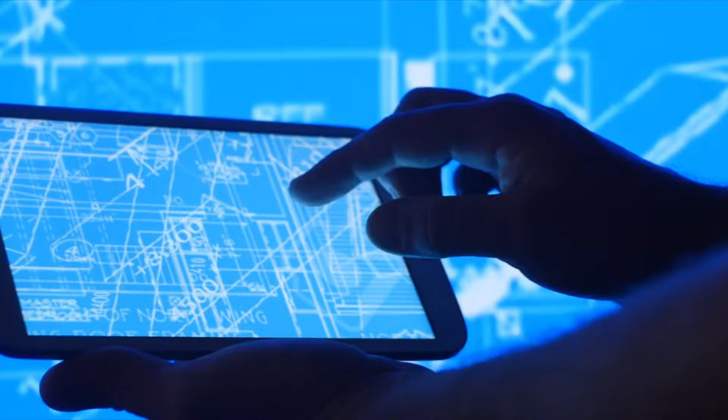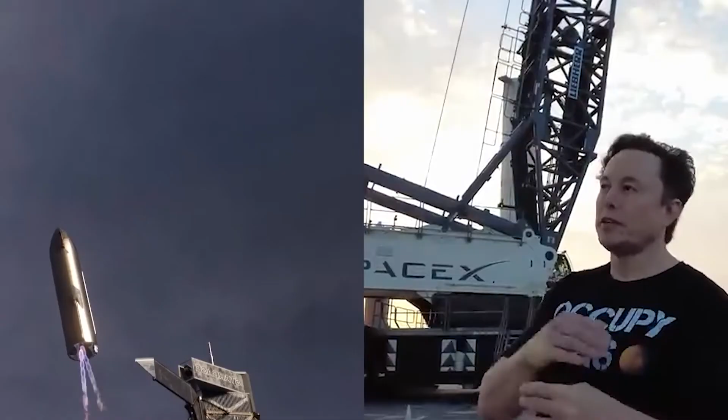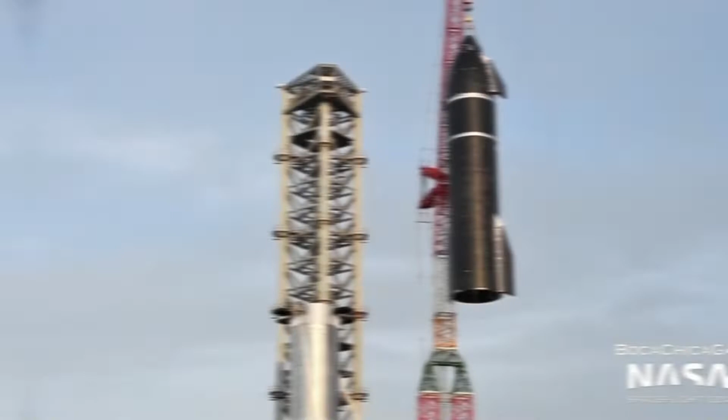The first manufactured prototype in engineering is always sloppy, but not in this case. You'll see how SpaceX engineers transformed a spacecraft that appears terribly crude into a much more complex model with smoother metal walls and less obvious welds over time. Compared to the previously produced rough, unsightly surface finishing, the welded connections appear brighter and smoother. So how did the spacecraft go from being a hideous masquerade to having a smooth, well-detailed surface?

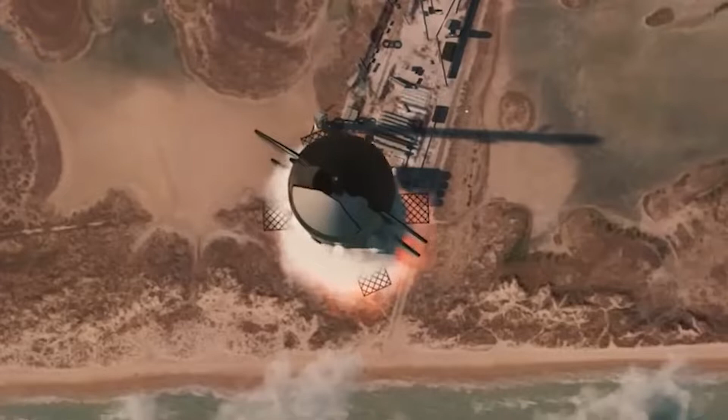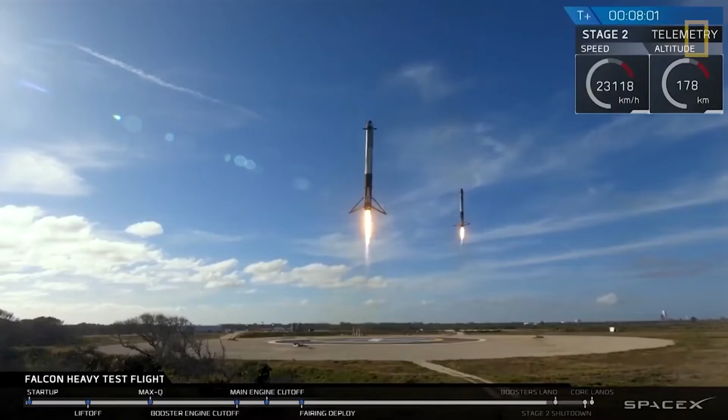You'll probably agree that the spacecraft, which stands 390 feet tall with its nose cone pointed upward, is the first structure that appears to be this tall and cylindrical. Did you know welders who worked as reservoir welders in oil corporations and water tanks were the first ones to construct the rough-looking prototypes of starships? These individuals had to be quickly hired by SpaceX to work on the spacecraft. So when it comes to cylindrical skyscraper-like buildings, inexperienced welders created the first Starship prototype. Therefore, they might not have acquired the first-hand experience necessary to operate on such tall, hollow, and wide constructions.

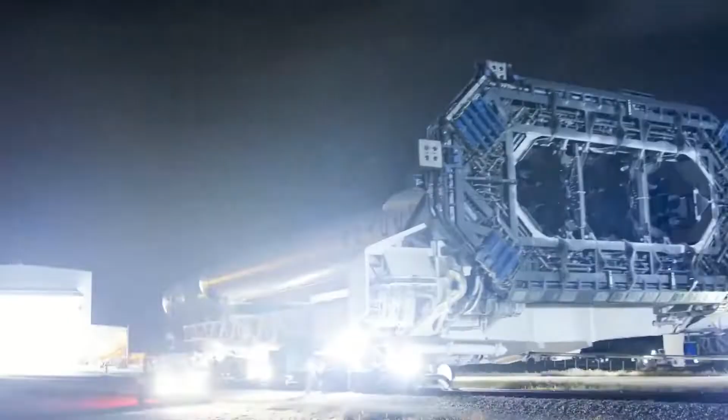But before we go into those details, let's take a look at what welding is and why it is so challenging to do correctly. Webster's Dictionary describes welding as the use of a hot torch to join two metals together.

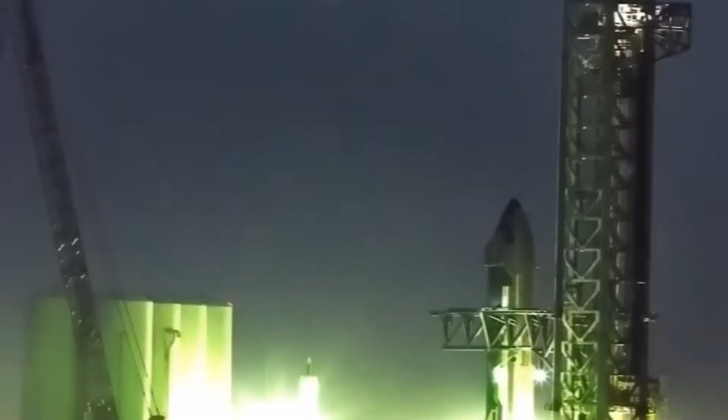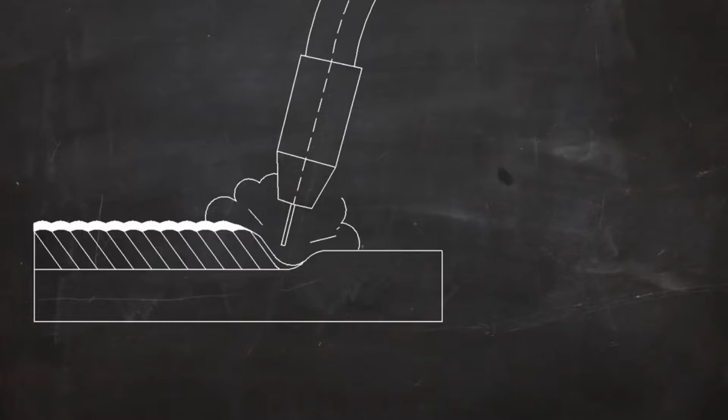How did SpaceX accomplish transforming the practice of rough surface welding into something smooth? To understand this, let's go back in time. The early Starship prototypes were built using a welding method called flux core. In this method, a metal wire is subjected to a voltage that causes an arc to form between the wire and the metal, causing the metal to melt. The metallic wire's tip melts as well, falling into the melted stainless steel to fill up any gaps and cracks that might have been there.

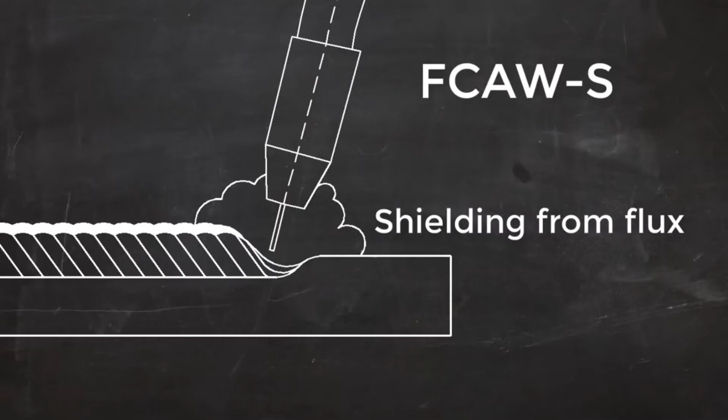Flux core welding involves wrapping the metal wire in a solid substance that, when burned, creates a shielding gas around the weld junction. This protects the weld and keeps it from interacting with nearby oxygen, which might potentially lead to failure. Each ring is made of a single, significantly thinner sheet of stainless steel.

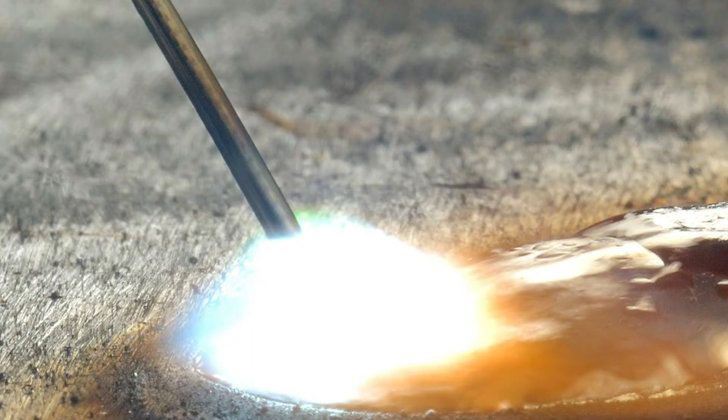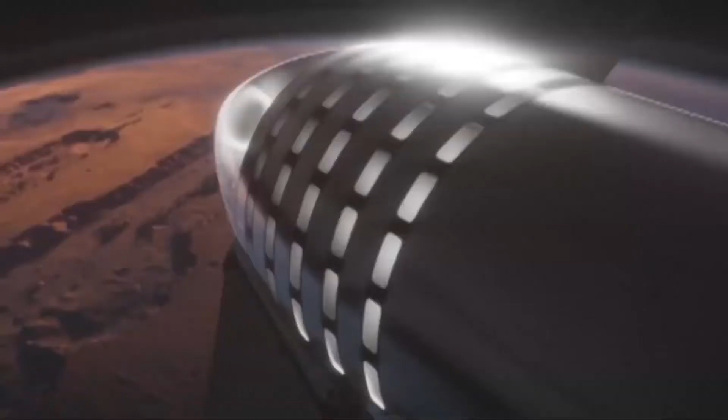This kind of thin sheeting will lower the steel's high melting temperature during the welding process. In order to avoid abrupt brittleness during welding, the engineers moved from stainless steel type 301 to stainless steel type 304L. The welders at SpaceX also upgraded to tip-TIG welding, which gives them more control over the welding arc. Compared to when prior welding techniques were utilized, this allowed the welder to tighten the arc and weld significantly deeper into the metal.

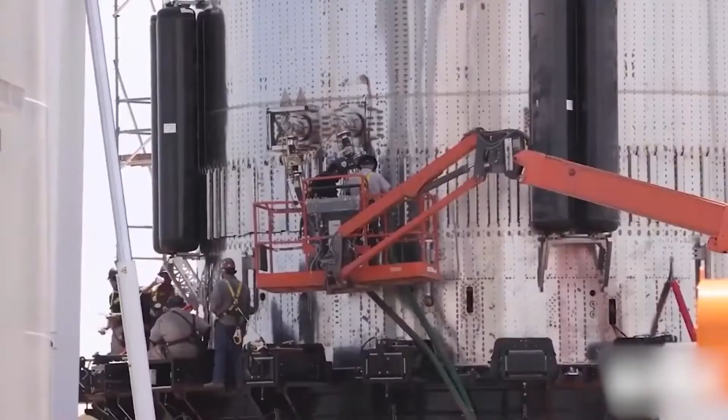SpaceX learned the value of purchasing robotic welding equipment from businesses like Liberty and KUKA. Robotic welding would allow SpaceX to automate the difficult welding process and start making welds that are cleaner and more accurate. For many of the Starship sections, SpaceX has probably turned to laser welding. It is possible to weld the ring segments in a single pass because the heat produced by laser welding is more focused and penetrates the metal to a deeper depth.

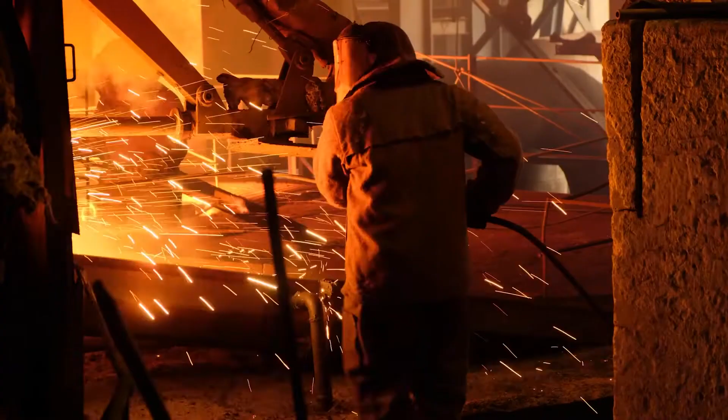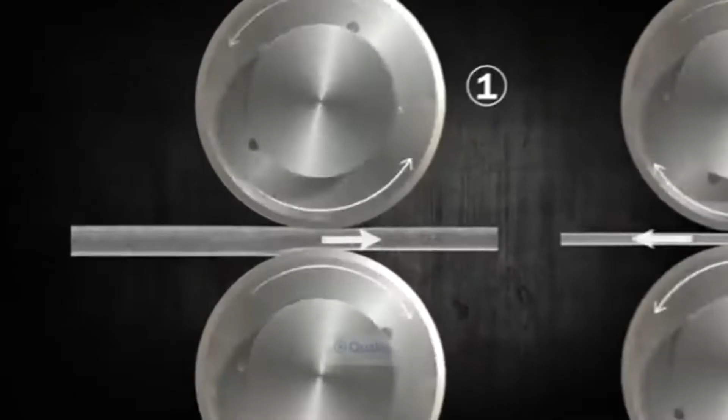To increase the strength of each weld, however, a different procedure must be carried out. Once more, before being welded into rings, the stainless steel that Starship uses in its construction goes through a procedure known as cold rolling after being cut. So what is cold rolling? Cold rolling is the process of compressing and spreading the metal's grain structure by passing the metal through a set of rollers. This process increases the metal's robustness and durability.

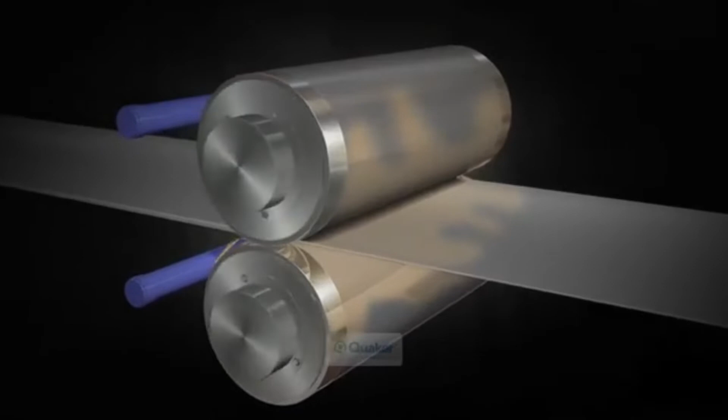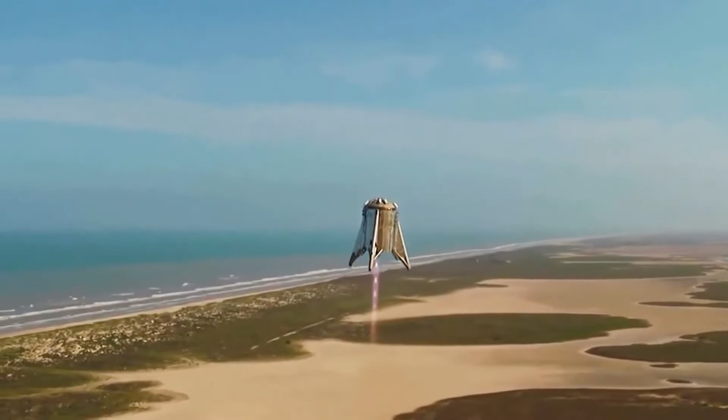Additionally, the heat from the welding process makes the welded section flexible. Therefore, a planishing machine will be put to use, enhancing the strength of all welded seams. The welds are squeezed during the planishing process with a hammer until they have the same hardness as the surrounding metal. Following that, the welds will seem better and the welded seams will have a much smoother appearance.

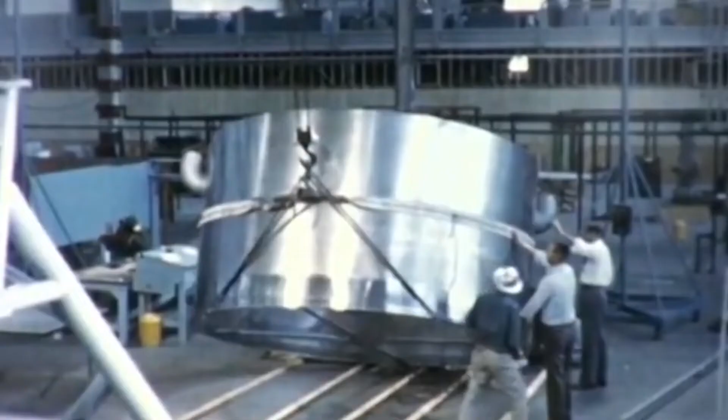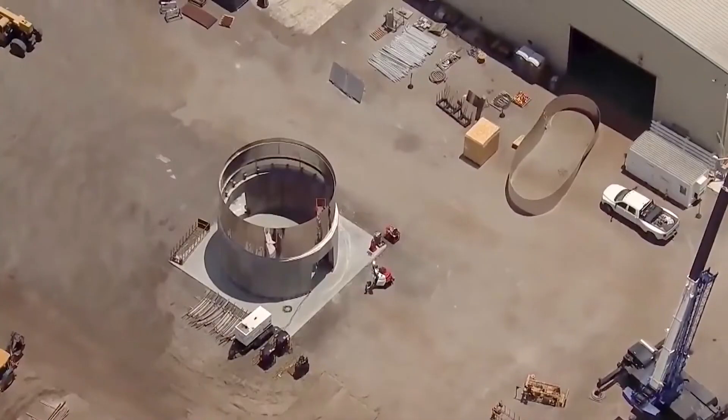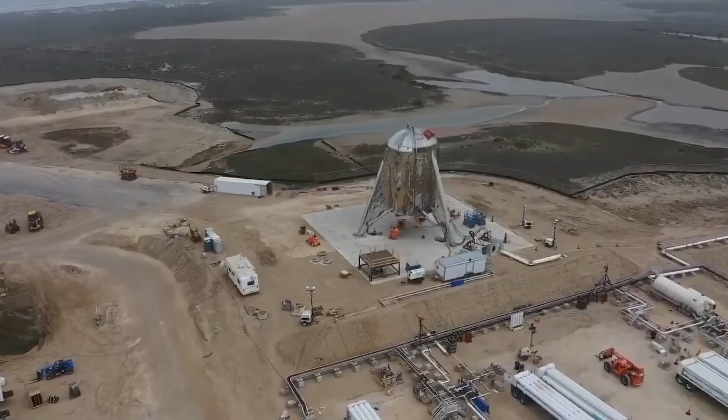To be clear, the work of SpaceX welders consists of more than simply applying welds. Although this may not always be the case, for Starship, a good quality for surface finishing is always maintained. This equipment is used to weld, cut, trim, fit, and construct metal components to the prescribed dimensions in order to build and assemble. Engineering drawings and specifications must be analyzed when planning welding operations in a location without procedural knowledge. And to do this, you cannot rely on unskilled laborers who are unable to construct anything out of metal sheets.

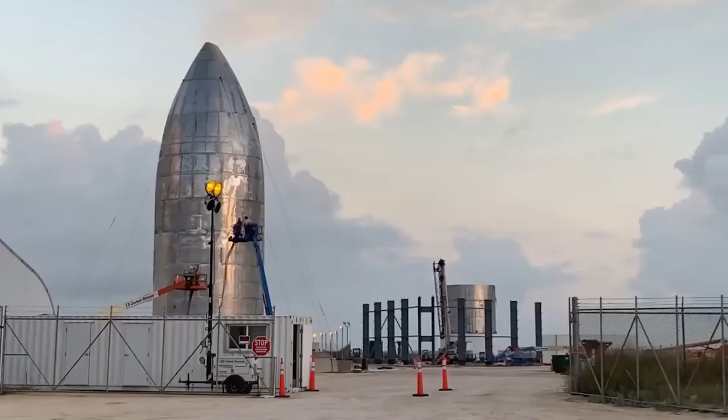SpaceX is required to train amateur engineers who are only proficient at welding metal on water or oil tanks and anchor them with advanced level professional welding abilities. The majority of these welders are still employed by SpaceX today on a full-time basis.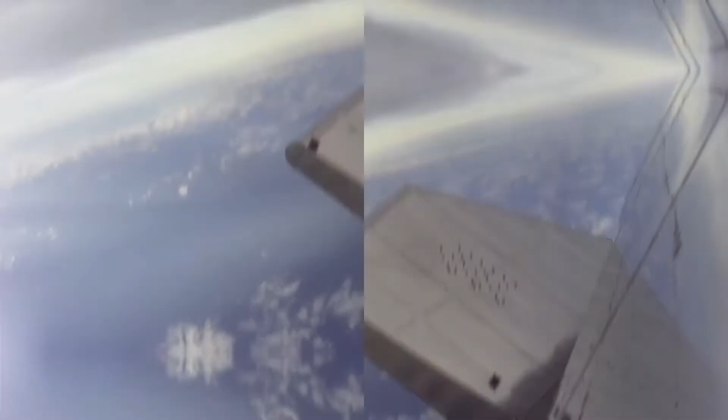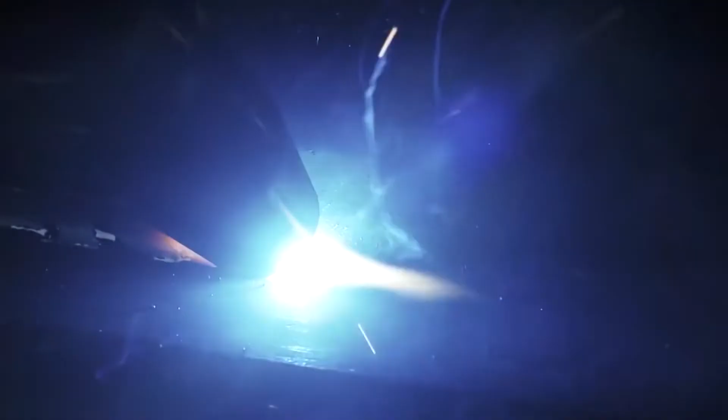Now let's talk about what transpired that initially gave the spacecraft a rough and unattractive appearance. This was a result of poor fitting and ineffective methods for managing heat intake. If done by hand, pulse MIG should have been used. The best way finally uses robotic pulse TIG or laser, which concentrates the heat and arc for a continuous weld. When done by hand, a welder can go so far before having to change or reposition something on the equipment.

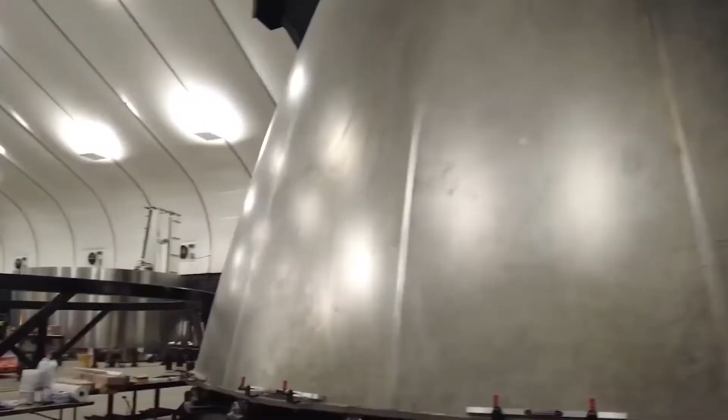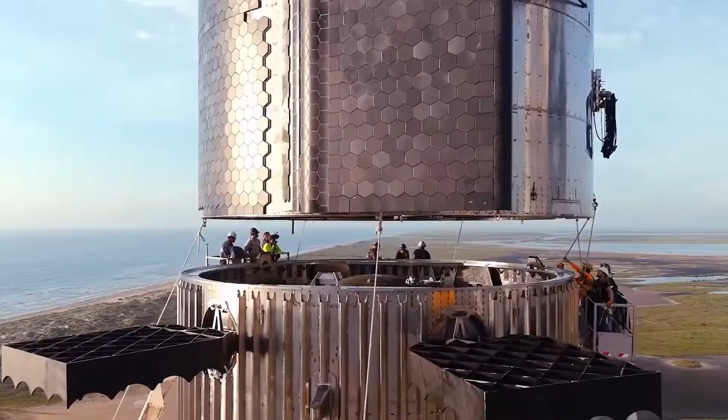Starship is experimenting with a lot of novel, unproven technology at once, despite the fact that SpaceX has a somewhat excellent track record with sketchy prototypes. Well, rocket engineering is challenging. It's appropriate to refer to this attempt as a first-generation rocket. The spacecraft is an experiment in every way. Nothing like this has ever been tried before. It is revolutionary in at least 6 fundamental technologies.

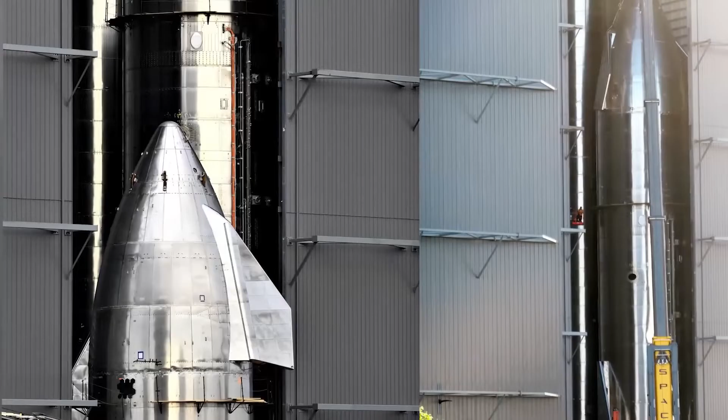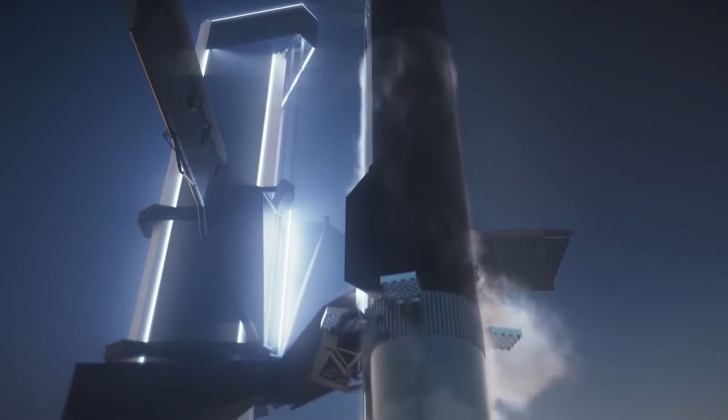SpaceX isn't just creating one spaceship, they're producing 1,000 to 3,000 of them. So the quick assembly process and the possibility of spreading these procedures out along a manufacturing line are undoubtedly taken into account, and that has significant impact on the Starship's construction materials. The idea of simply mass-producing Starships by rolling the stainless steel into 9-meter diameter rings and robotically welding the rings together to make long tubes without having to cut or bend the material is quite appealing.

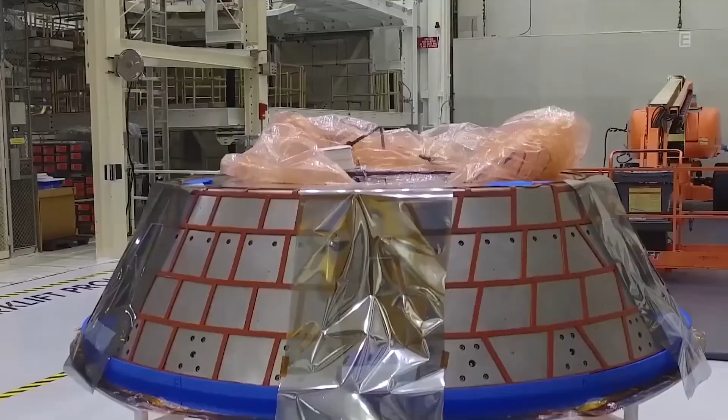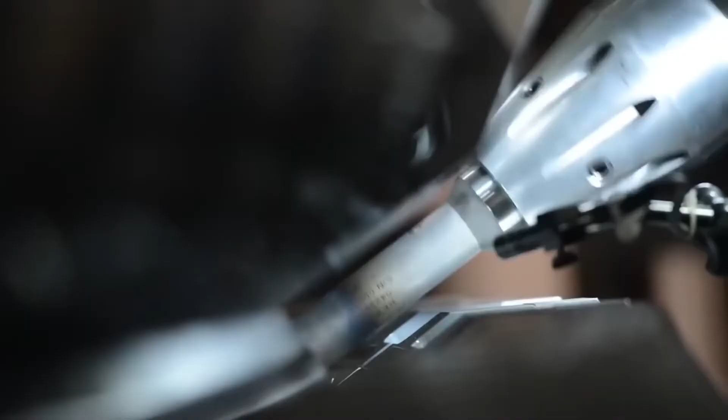We would definitely love to walk you over how things are done in Boca Chica someday. There is in fact a sizable tent where they have repeatedly rolled out stainless steel and a separate area to weld the rings. After electing to use stainless steel, SpaceX began to reap further advantages from the gleaming stainless steel that nature had given them.

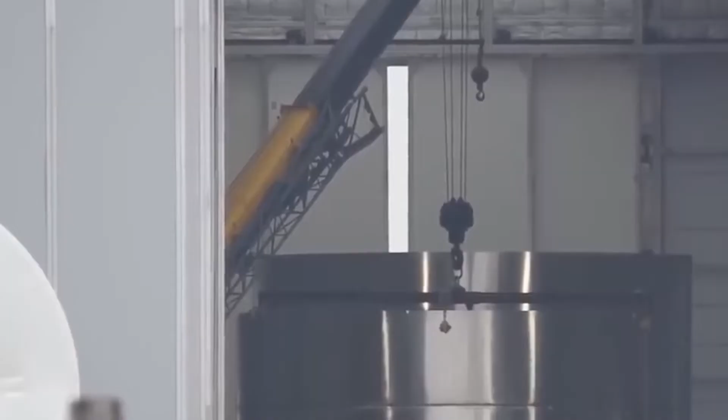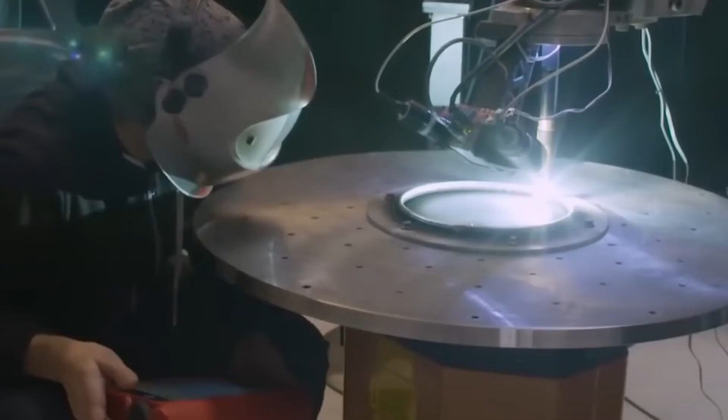There's no need to paint it since stainless steel becomes much stronger at cryogenic temperatures, which is great news because liquid oxygen and methane impose enormous pressure on structures when they are kept at ridiculously low temperatures. Additionally, they may friction/stir weld the structure, a skill that robots excel at. This is because the temperature encountered upon re-entry is lower than the steel's melting point.

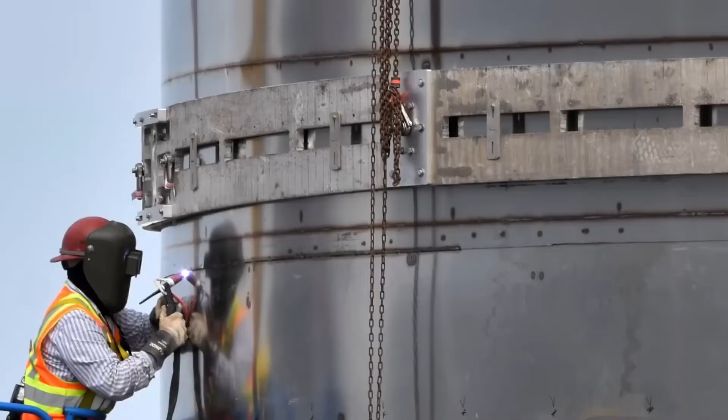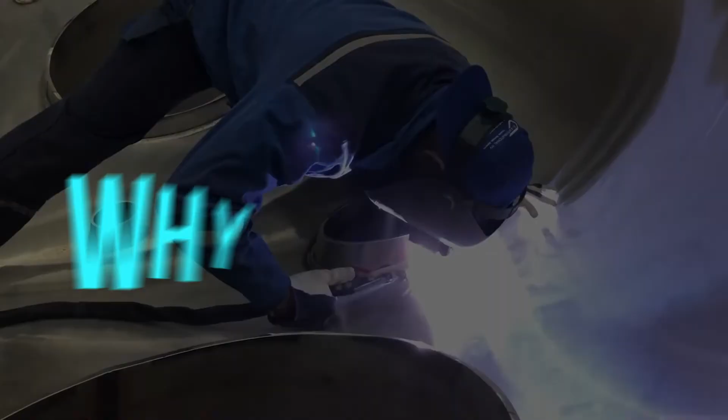Elon Musk and SpaceX place a high priority on using good, cost-effective materials that enable reuse. If there were a better or less expensive option, SpaceX would have employed it by now. So similar to the case of a commercial aircraft, why not use carbon fiber instead? If carbon fiber is employed by SpaceX and it functions as intended, less fuel would be required to launch the spaceship into orbit as carbon fiber is lighter than steel.

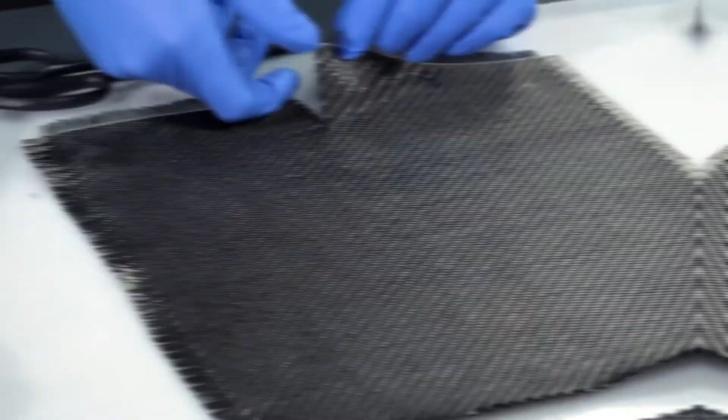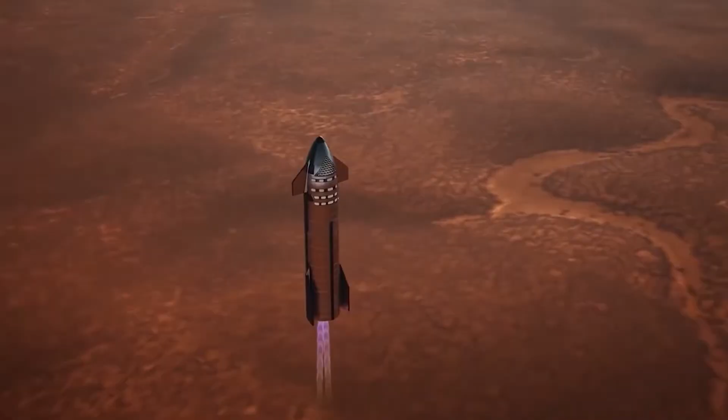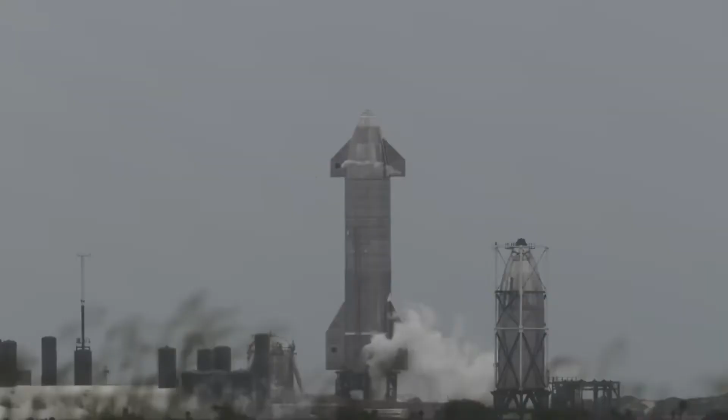So why did SpaceX eventually throw away the carbon fiber to build the spaceship prototype? Let's examine the spacecraft that used carbon fiber in the first case scenario to arrive at this answer. Although the initial BFR idea employed carbon fiber as the fundamental construction material, it was eventually abandoned since it was found that carbon fiber was a poor choice for a vehicle that had to handle temperature extremes ranging from minus 180 degrees Celsius to 1600 degrees Celsius, especially during re-entries.

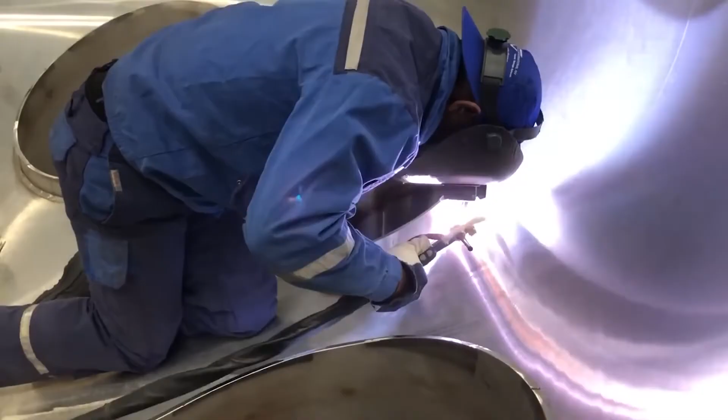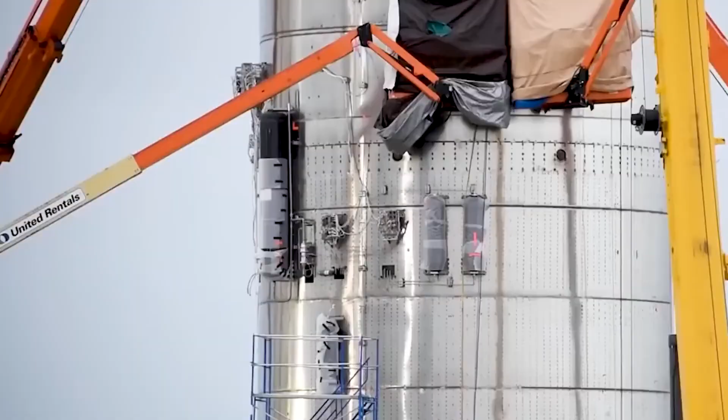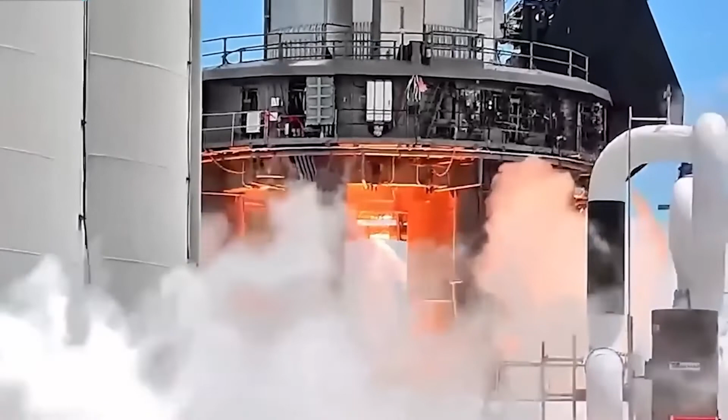If you want this composite to survive at high temperatures exceeding 1000 degrees Celsius, you'll need complete insulation and a heat shielding system to take this into account. Stainless steel, on the other hand, is far more tolerant of a wider range of temperatures. It's more robust at cryogenic temperatures and, significantly, retains a significant amount of strength even at temperatures of 1000 degrees Celsius and above. The demand for insulation and a thicker heat shield is greatly reduced as a result.

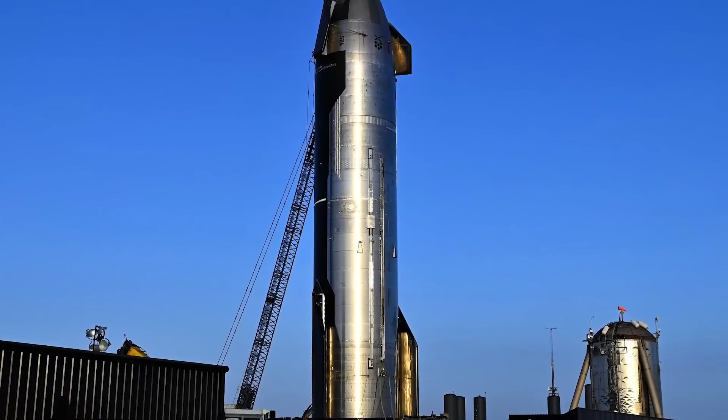Another crucial factor to take into account is the price difference between stainless steel and carbon fiber, which is to be employed in a system that can be considered more cost-effective. So, using stainless steel comes across as a smart move by SpaceX, and perfecting the welding is only adding to its proficiency. What do you think?